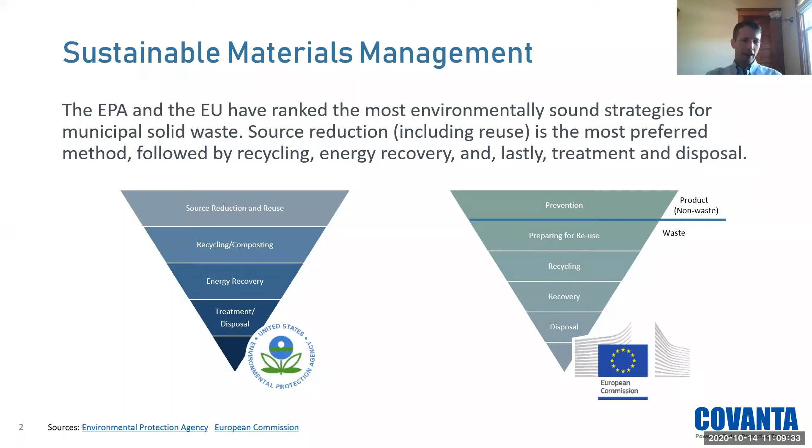And certainly a lot of the discussion that we've had recently with regard to the pushback from China in terms of contamination, and most recently with the Climate Leadership and Community Protection Act in New York, we're all looking again at the waste management approaches from that environmental framework, and I think very appropriately taking a more expansive view of it. And where energy from waste, or waste energy, really fits in is as the preferable option for what's left over after recycling efforts have been exhausted.

And years ago, I think this really started around the idea of materials efficiency, energy recovery, sustainable use of land, and over the decades, particularly as climate has become a greater concern, we found that the climate change impacts are roughly in order with this hierarchy as well. And so if we look at those two choices left over after recycling, landfilling and waste to energy, they're still the two predominant ways of managing waste that's left over after recycling. We can get into a little bit of the detail in terms of what drives that ordering in the hierarchy.

From the climate perspective, landfills are a major source of man-made methane. Globally and in the US, landfills represent the third largest source of methane. And methane is an interesting greenhouse gas because it is very, very potent, yet has a relatively short time frame in the atmosphere. So when you look at methane's impact over a 20-year perspective, as we're starting to see more policymakers and scientists do, methane is actually 84 to 86 times stronger than CO2 in terms of its impact on the climate.

Turning to other non-greenhouse gas issues, and certainly one that's of particular interest, I think, to folks in California, is the risks around leachate generation and groundwater contamination. A lot of times you'll hear people within state regulators and the EPA talk about, it's not if landfills are going to leak into the environment, it's when and what's the impact to the surrounding community.

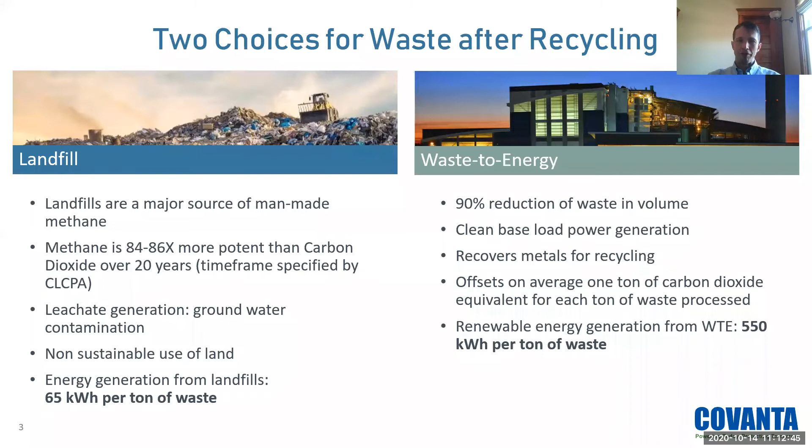I know Derek will speak about that a little bit more during his presentation. And if we look at things from a climate perspective, turning back to that again, every ton of waste nationally that we're able to divert from a landfill to a waste energy facility saves about a ton of greenhouse gas emissions as CO2 equivalents. That's a fundamental benefit of waste energy over landfilling. And it's one we often get a lot of questions about, because it's not necessarily intuitive to tell somebody that a facility with a stack has a greenhouse gas benefit.

The reality, and what really drives that, has to do with what would have happened if the waste did not wind up in a waste energy facility. So if we look at this chart, the first bar on the left-hand side shows the picture if we look just at the stack in terms of what the CO2 emissions are. We find that roughly for every ton of waste we process, we emit about a ton of CO2.

Two-thirds of that CO2, in terms of what we monitor today, is from biogenic sources of waste. Think about food waste that's not sent to an AD facility, or paper and cardboard that hasn't been recycled. That all contributes to that two-thirds.

The remaining one-third of the waste we process, and the carbon in that waste, is from plastic materials — think non-recyclable plastics, plastic films, containers that don't get recycled. That's typically the focus from a public policy perspective: reducing those fossil CO2 emissions down to what we possibly can. That's the basis for the comparisons on a life cycle basis that the US EPA and others do.

The second bar then starts to look at what would have happened if the waste energy facility were not in place. The first piece is what we would have needed to make that electricity from another resource. Still today in New York and other places, we still generate a lot of our electricity from fossil fuel fired power. So that's a significant benefit that our facilities are able to deliver.

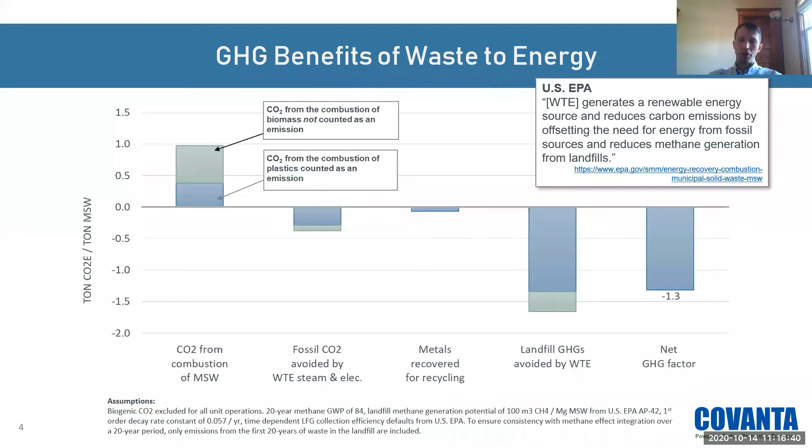So you sum all of that together, taking into account our positive greenhouse gas emissions at the stack, but also considering the benefits the technology brings. In New York, under the Climate Leadership Act, we're actually reducing emissions relative to landfill by about 1.3 tons of CO2 equivalents per ton of MSW.

And importantly, it's not just us saying this. It's very widely accepted internationally in terms of the benefits that waste energy brings, anywhere from the European Environment Agency to the IPCC, which called waste energy a key greenhouse gas mitigation technology, to the UN and the Rio UN conference, World Economic Forum. The original Clean Power Plan as proposed by the Obama administration would have considered waste energy to be an option for reducing a state's greenhouse gas emissions.

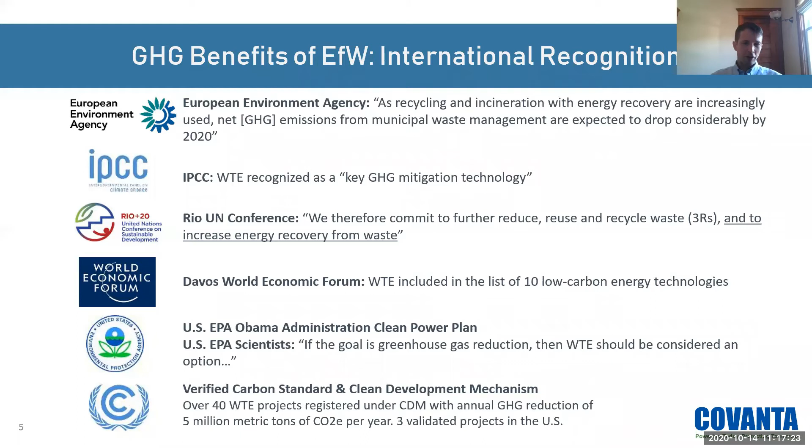And we actually have three facilities that have been approved to generate carbon offset credits, and two of them sell those credits into the voluntary carbon market.

And if we look back at New York, one of the challenges that the state faces is how to deal with the emissions from landfill methane. Amazingly, landfill methane is 11% of the state's greenhouse gas baseline, which is just an amazing amount for a sector that typically doesn't get a lot of attention when it comes to greenhouse gas policy. And when we look at it, it's even more than residential fuel combustion. The challenge the state is going to face is that we really don't have great end-of-pipe options for controlling the methane that landfills emit, which goes back to the waste hierarchy.

The best form of environmental protection often is prevention. So the more waste that we can divert out of landfills, the better chance we stand in meeting the state's targets. And part of the challenge is that when we actually get out and measure methane emitted from landfills, it's coming in at about double what the predictions initially thought.

And when we turn even to California, they've struggled with this for the last almost a decade now, and implemented as part of their greenhouse gas reduction program what they call a series of early action measures, and implemented the most stringent landfill gas control regulations in the country.

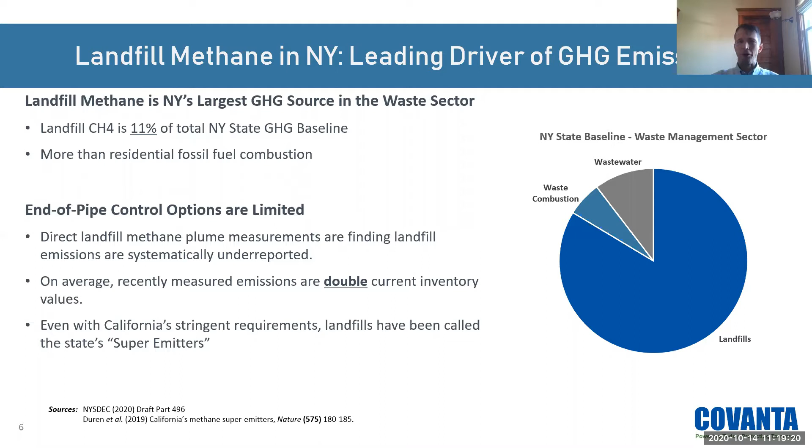And even with those regulations, when NASA did a study of what the methane emissions were and what the methane sources were in the state of California, they found that landfills were the largest point sources of methane in the state, and characterized a subset of those landfills as being methane super emitters. That really underscores the challenge we face with regard to trying to control methane after we've put the waste in the landfill. It's just extraordinarily difficult to capture what we need to do to reduce greenhouse gas emissions.

So what that really brings us to is what our options are. It's pretty clear that the Climate Leadership and Community Protection Act is going to impact every single sector in the state's economy very significantly. Getting the economy of the state down to net zero carbon by 2050 is just a phenomenal task. And it's clear in the waste sector that we just really need to get out of the business of landfilling. We need to find better things to do with the waste, whether it be recycling, composting, anaerobic digestion, but also using waste energy as appropriate to help us reduce emissions from the residues that are left over after recycling and composting is exhausted.

And I think there's a few things here that we just wanted to point out. In order to get down to that net zero greenhouse gas emissions, even the waste energy sector is going to have to take a hard look in terms of what our facilities look like in, say, 2040 and 2050. And what I like to think about our facilities is that they're really important technology platforms where we can bring a lot of carefully engineered solutions to the table.

Recognizing that there's always going to be a residual waste that we need to manage, and that residual waste is going to have some form of an impact. Waste energy facilities give us an engineered potential to actually reduce and minimize that impact. And one of the really great aces in the hole that I think we've got as an industry is that one of the things the IPCC has pointed out is that in order for the world to get to a net zero greenhouse gas scenario by 2050, we're going to need to figure out how to do some carbon removals from the environment.

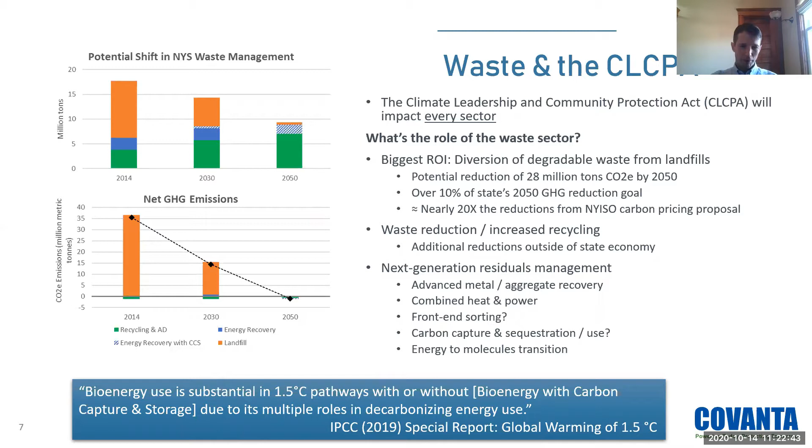All right, thanks Mike. Good morning everyone, it's a pleasure for me to be here and take part in this.

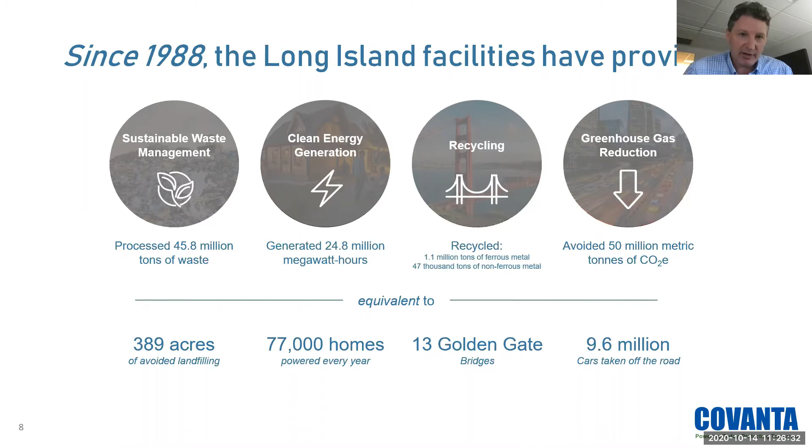When you think about making fundamental improvements around infrastructure and ways of life, I would argue, if you're stuck in traffic, frustrated with how long you're stuck, anything we can do to clear the transportation lanes of unnecessary truck traffic is fundamentally very important.

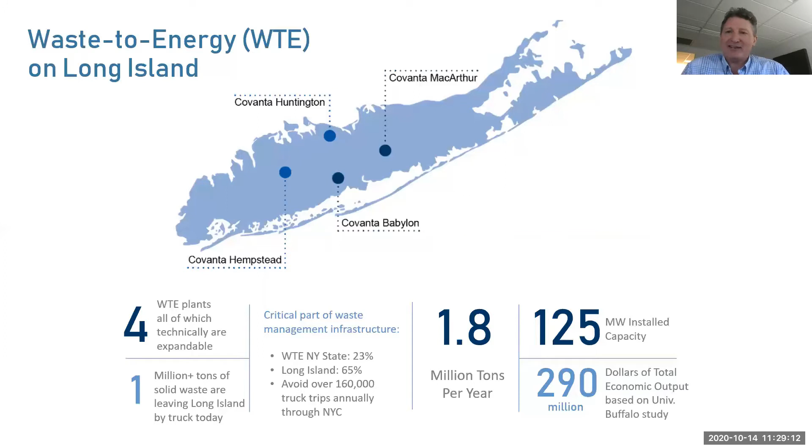So Mike, why don't we go to the last slide?

Part of my job is a little bit of a salesy job. Mike's the science guy, my job is a little bit of the sales guy. So I like to think about what's really possible for energy from waste on a go-forward basis, in the context of, you know, when I mentioned back in the mid-80s.

You know, nobody had a cell phone really unless you were in the military. If you were traveling somewhere and needed a phone, you were in a phone booth adding quarters, trying to make a call, trying to figure out where you needed to get to, right? And today we have a smartphone at the tip of our finger that gives us more information than we possibly know what to do with.

But at the same time, when you look at energy from waste, the basic fundamentals are still as strong as they were in the late 80s. Good mass burn technology coupled with sophisticated air pollution control has done remarkable things. After 30 years, it's still performing well, and we've been able to drive emissions even lower over that time frame.

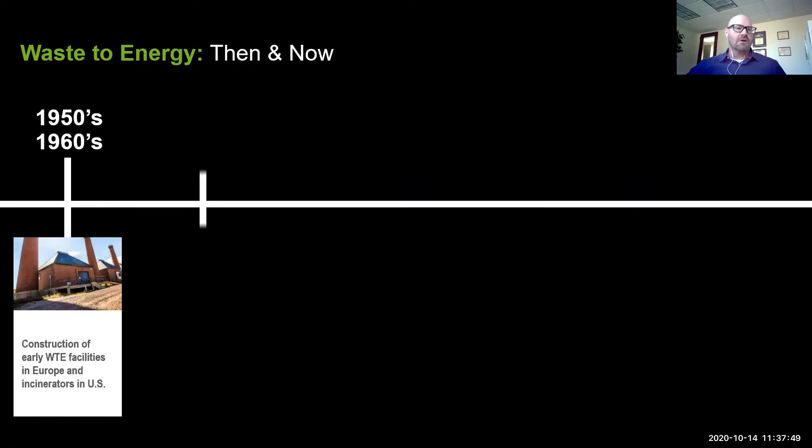I'd like to start off by talking about where we started and where we are now. As a way of history, in the 50s and 60s is really when Europe started to build their first modern waste to energy facilities using combustion stoker technology and recovering the energy to create steam and electricity. The U.S. took a little longer to catch on. In the 70s, as many of you know, the majority of our facilities were built in the late 70s and early 80s, and a lot of those facilities are still in operation today, including the 4 that are out on the island that Derek mentioned.

The 90s, particularly the late 90s, which is when I got my start in the industry, was really more focused on the Clean Air Act amendments and retrofitting a lot of the facilities that were built, particularly in the late 70s and early 80s, that weren't built with the Clean Air Act amendments in mind. That's kind of how I got my start in the industry, working on those retrofits, including at the Islip MacArthur facility.

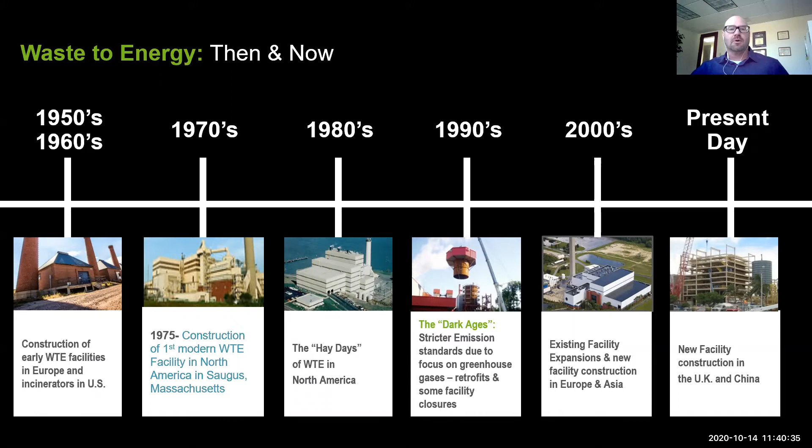But the United States becoming really an energy exporter, the price of electricity really drove down the economics of a lot of those projects, and really only 2 in North America got out of the starting gate and implemented. But that being said, in the present day, there's still a lot of activity in Europe, as Derek mentioned, and in Asia, and there's still interest here in North America as well. And there's a lot of discussions about expansions, particularly in certain geographies of the U.S. and even some contemplation of new capacity in parts of Canada and other parts of the U.S.

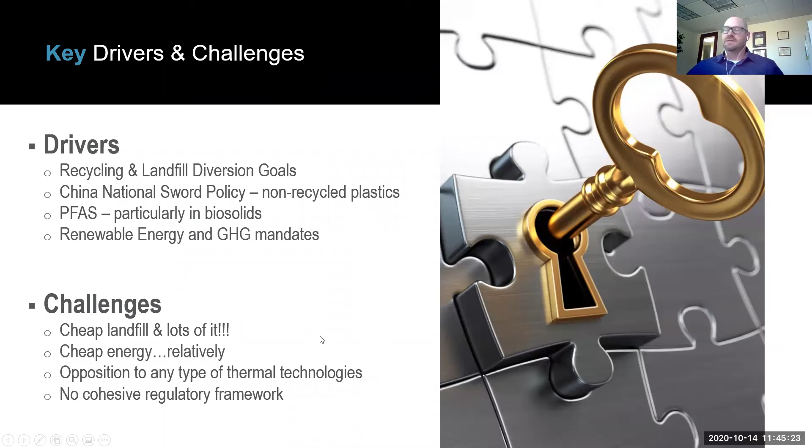So just a really quick technology 101, and I won't get too far into the theory here. Really my focus today is more on thermal treatment or thermal technologies like traditional mass burn or RDF combustion technologies, which use excess air or a lot of air to treat and combust the waste. And then we'll also talk a bit about gasification and pyrolysis and plasma arc technologies, which typically operate under a substoichiometric or less than excess air, or in the presence of very little air or oxygen or no oxygen at all.

But there are other technologies out there, obviously biological treatment, and there's a lot of interest in anaerobic digestion for treatment of organic materials, which is really a proven technology for something like sludge or biosolids, but it's still in development, particularly for a mixed municipal waste stream. But it's a growing interest, particularly up north of the border in Canada, out west in California, and in parts of the Northeast as well.

And then we'll talk a little bit about mixed waste processing technologies, but I combine those really with a lot of these alternative thermal treatment technologies, which require some front-end processing, or they're part of a hybrid type system that may use a very elaborate front-end system to separate out the different materials, followed by a thermal treatment process, and then sometimes a chemical treatment process to create a fuel.

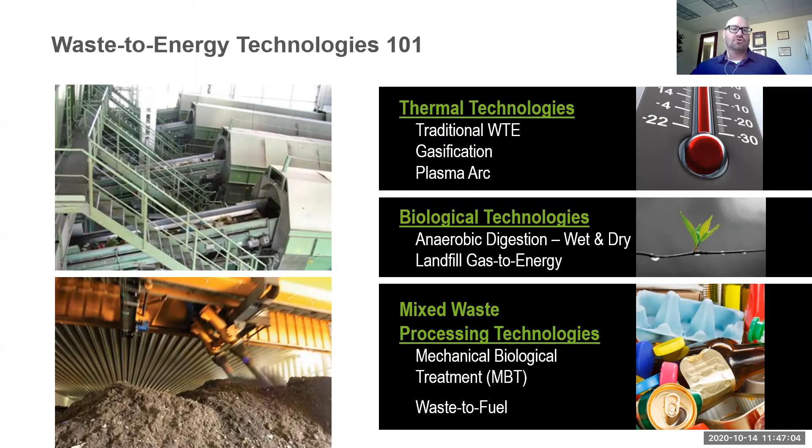When I speak to groups like yourselves or municipalities or industry groups, I always like to try to classify waste conversion technologies into two pieces. There's the established technologies like mass burn or RDF combustion, and I think Derek made this point previously. I'd stress that the facilities being built now are not your grandma's waste to energy plants. They're far more efficient from an energy production standpoint, as well as from a flue gas treatment and air pollution control standpoint, than the facilities we built even 20 or 30 years ago.

So whereas we kind of stopped building them here in the U.S. for a number of reasons, in Europe and in Asia they never really stopped. And instead of halting the industry, they really developed them and fine-tuned them to be really efficient and clean facilities.

And then there's emerging technologies, and some of these may not be considered emerging in other parts of the world, but I'll talk a little bit about the differences there. Those emerging technologies are really ones that haven't had a wide commercial application, like gasification, at least for mixed municipal waste, or pyrolysis or anaerobic digestion, that at least here in North America and in the US are still in various phases of development, with starts and stops and successes and failures.

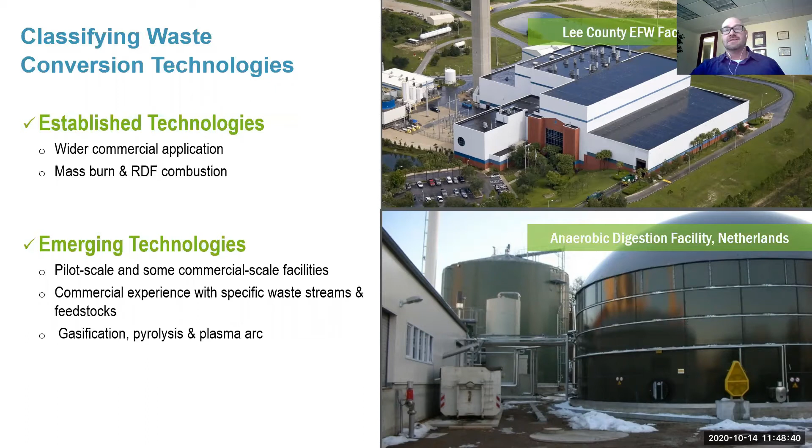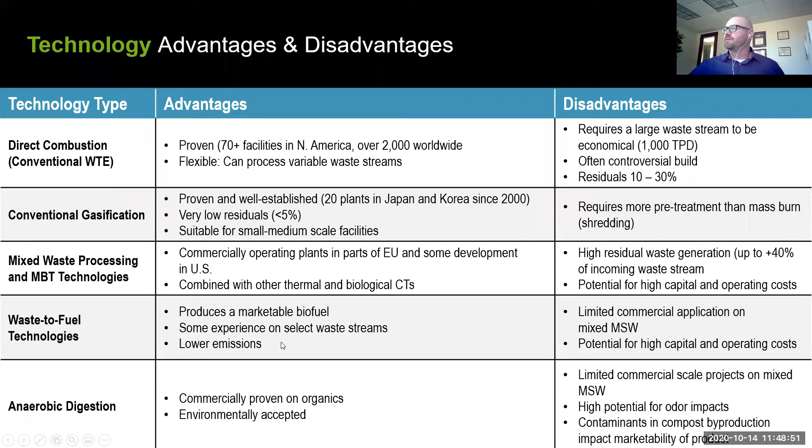So this is just a quick overview of advantages and disadvantages, and I'll make the presentation available to folks, but I'm going to keep moving if that's all right.

So just to go through a little bit of a global perspective on waste to energy and where the technology is abroad, and Derek touched on this particularly in the projects in the UK and in Ireland, the EU has a landfill directive that requires some pre-processing before you can put it in a landfill, if in some countries you're allowed to landfill at all. In countries like Denmark or Germany, there are landfill bans, and in most EU countries, if there's not a ban, there is certainly a financial disincentive, either taxes or levies, like in the UK, that make it incredibly expensive, sometimes $100 a ton on top of a gate fee, to put it in the landfill.

And again, they have different drivers in the EU. They don't have the space that we have here, and that drives a lot of it. But it's also a sense of environmental responsibility that they feel.

I've heard Europeans, when I've been over there, call it interim storage, that at some point or other, those liners are going to fail, and it's just a more responsible method to treat it in some manner before it gets put into the ground.

They also have higher energy pricing, and there's government incentives that exist in the EU and in some of the EU member states or in the UK, whether it's on the power they buy or on the projects themselves, that just don't exist here or in other parts of the world for that matter.

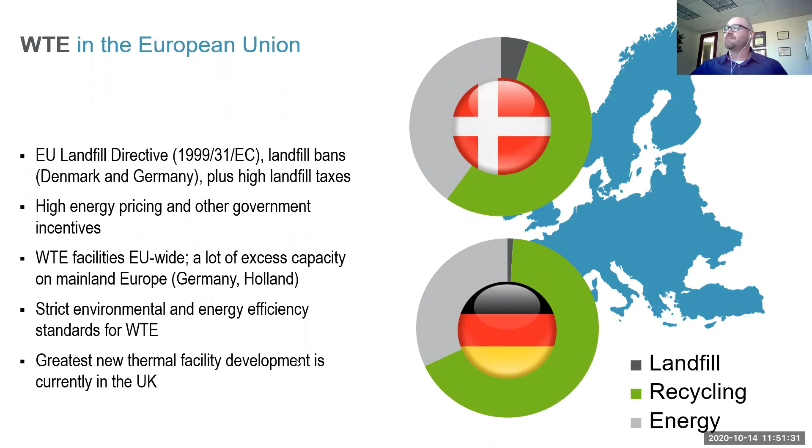But there is still some development, particularly on specific waste streams, whether it be plastics or hazardous wastes, that they'll use the high temperature type gasification projects to treat those wastes. But overall, when it's municipal solid waste, it's typically a thermal combustion type stoker project. And that being said, they still have very strict environmental regulations in the EU, and emissions requirements, much more stringent than the US in most cases, and they're able to meet those with mass burn technology.

And it's widely accepted. And this is a good example, and I think Derek was alluding to this in his presentation, that they also take a very different approach to how they build and the aesthetics of these facilities. Very often these facilities sit right in the middle of a city. Copenhagen is a good example. There's 4 to 5 facilities in Greater Copenhagen that all feed into their district energy system. And this was one they constructed a couple of years ago that actually has a ski lift on it.

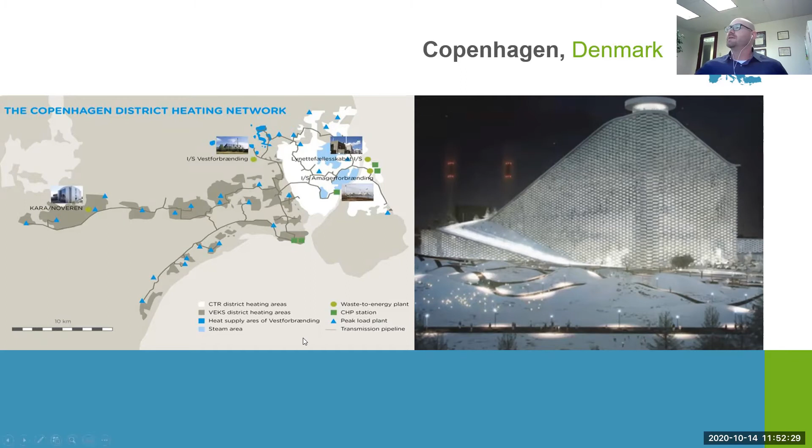So, money is no object apparently, but they certainly take a lot more pride in these facilities and in developing the aesthetics. This is another project. This one is in the UK in Oxfordshire. And you can see, again, it's an example of how they expand the architecture, and really, they want these facilities to be a showcase because, again, very often they're right in the middle or just outside of a town, and they provide district energy as well as electricity to that community.

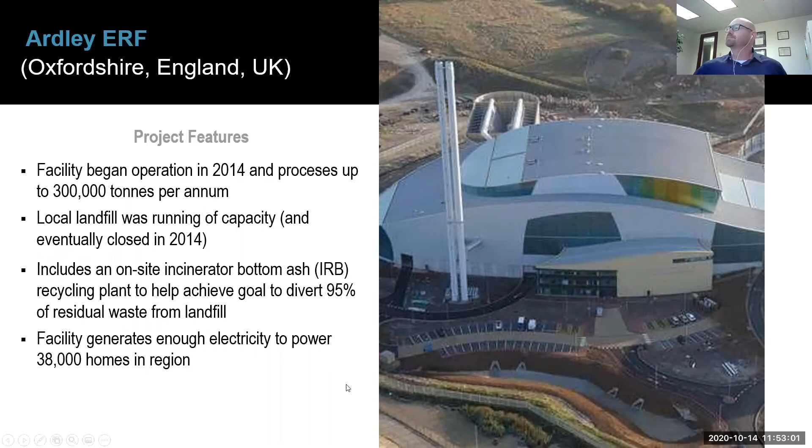Europe hasn't gone without its challenges and failures. I'm sure many of you heard about the Tees Valley project, and this was a plasma arc facility or technology. Alter NRG was the main technology provider for this, and Air Products, which is a major gas provider company in the U.S., was really backing this project for a number of reasons. And this is a good example of the dangers of scale up, in that the technology that Alter NRG had applied in parts of Asia was maybe at most 200 to 250 ton per day sort of modules.

And this was a scale up to 1,000 tons per day. So that 4 to 1 or 5 to 1 scale up really was never proven. And they ran into a lot of design and operational difficulties, and ultimately financial difficulties getting that facility online. And eventually Air Products walked away from it at a loss of almost $1 billion US. So, you will see some more of these as I go through the technologies.

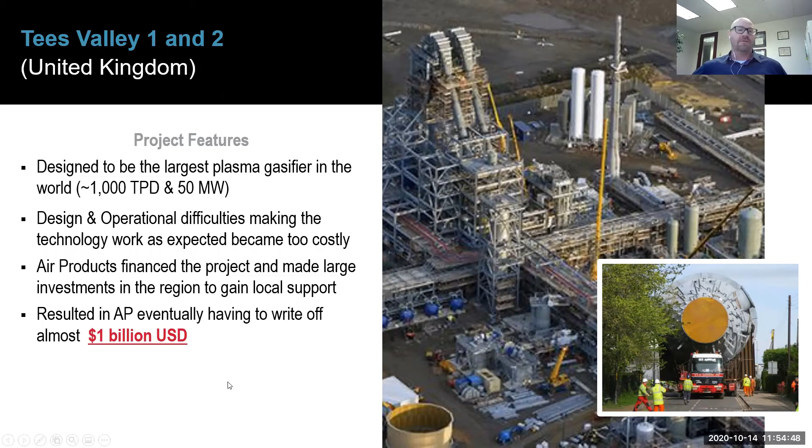And I'm technology agnostic, but also as an engineer, and often advising communities like out in the island or wherever I've advised clients, I've got to take that level of caution that things like scale up are important. Things like experience with similar feedstocks is very important. And this was a good example of a lot of money being spent without fully thinking through whether the project was going to be successful.

Asia is interesting and very different. Certain parts of Asia are very similar to Europe, particularly Japan. They don't have a lot of space to get rid of waste. They don't have a lot of landfill space, and each prefecture in Japan is required to manage their own waste streams. So a lot of their drivers are very high population, not a lot of space to build additional landfill capacity. In places like China, it's kind of a shift to be more responsible and find ways of treating it versus landfilling it. And so they're more open to not just traditional thermal waste to energy.

Japan certainly has a lot of traditional stoker-type technologies implemented all over, but they are also more open to gasification-like technologies, and I'll talk more about that. In Japan, they may have a stoker technology, and the ash residue coming out the back end of that traditional waste energy facility will then go through a gasification or ash melter process to vitrify the ash or further treat it so they can use it for road base or as fill material, which is very different than how we treat ash here in the U.S., as Derek had mentioned.

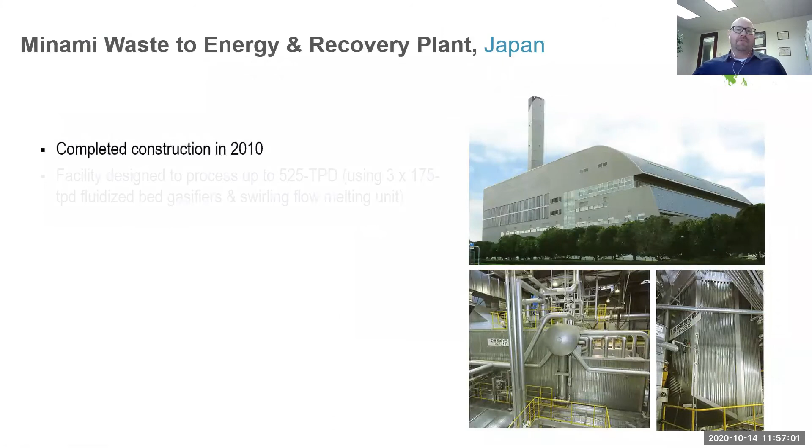So this is an example of a gasification plant. I've had the opportunity through HDR, and also work I've done for the Air Force, to go to Japan and visit some of these facilities. It is a mixed waste material.

Obviously Japan is very regimented as far as what they separate. If you go into a McDonald's in Japan, there must be 4 or 5 bins, and one of them even includes a bin with a little fire on it to indicate that's stuff that will go to the waste energy facility. So they're very regimented in how they separate materials at the source. But at the same time, because of regulations and because of limited landfill space, they're also often more open to some of these gasification technologies.

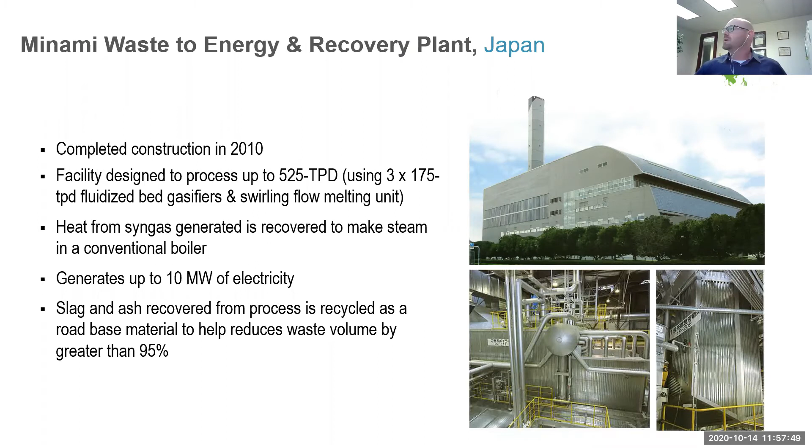This facility, as well as the next one I'll talk about, that I had the opportunity to visit, it's a mixed waste material. You can look in the pit and it looks like our garbage, although a little more separated. And they process it. I think the important thing to understand too is, when I've gone there, they don't necessarily try to reuse the syngas and create a fuel or something out of it, like some of the technologies that are advertising here in the U.S. or other parts of the world.

They almost treat that gasification technology — it doesn't look much different than a mass burn stoker as far as having an air pollution control back end that cleans up that syngas and then releases it through the stack, and they just recover the heat from that syngas in a heat recovery steam generator or boiler, similar to how we would in the 4 facilities out on the island. They're very wary, and they've tried to do more with that syngas, but I think they feel the technology and the science just isn't there yet to make it economically feasible. So that's important to understand when you hear some of these technologies come out and say, yeah, we're going to convert this into a fuel or some sort of biofuel.

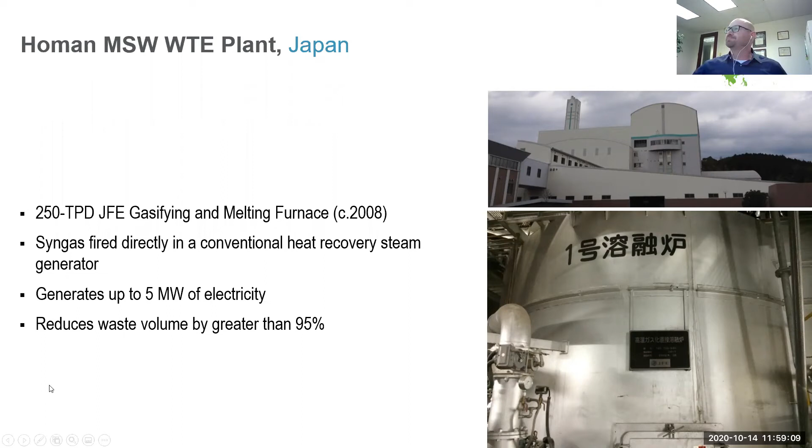So coming back to the U.S., just by way of background on where things are: we still have over 70 facilities in operation today. That number seems to shrink every year, unfortunately, due to economic and even socioeconomic reasons, with facilities being closed down or forced to close down. But we still landfill a lot of our waste stream, and less than 10% — a number that probably continues to dwindle — of our waste stream in the U.S. is actually processed through a waste to energy facility.

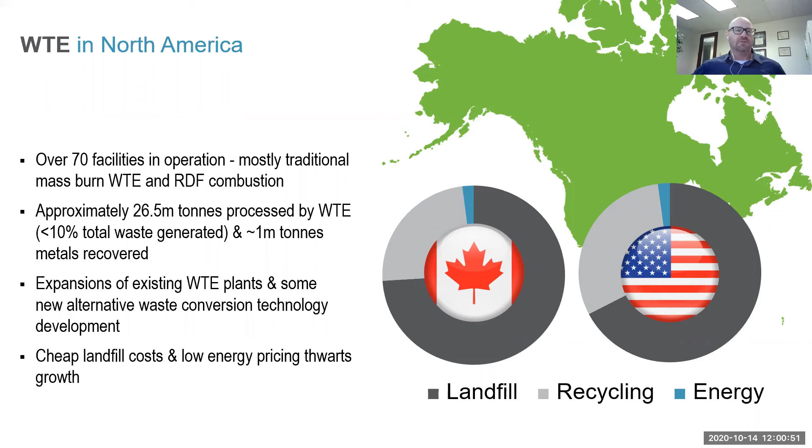There's still a lot of discussion of expansions or even building new facilities, particularly in certain parts like Florida, or maybe there's consideration on the island for that matter, given some of the challenges out there. But the challenge remains cheap landfill costs, and looking at the economics a little differently, since we're not going to get the same electrical pricing that we got in the 80s or 70s during the oil energy crisis. So how do we pivot what we traditionally did with these facilities and maybe open them up to other initiatives, like Derek mentioned — zero emissions and electrification initiatives being contemplated, particularly on both coasts, with converting fleets to electric or that move to electric vehicles.

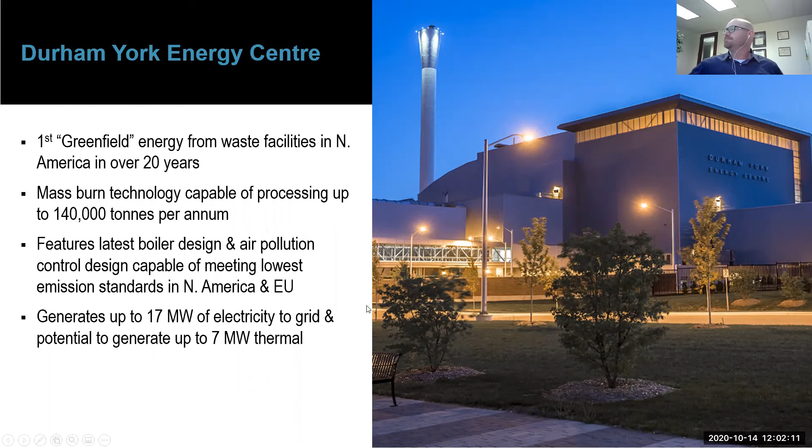Many of you may have heard about the Enerkem project. You probably haven't heard a lot about it other than it exists, and you're not alone. I've been to the facility a few times.

This is a good example of a hybrid type system where it's a mixed waste front end process. That was built by the city of Edmonton to separate out different materials, improve their recycling, and also to capture organics. The off-stream of that mixed waste processing or front end system is this sort of spec fuel, I'll call it, that goes to the Enerkem biofuels facility. They take that fuel and convert it into methanol and then ethanol through a Fischer-Tropsch type process - gasification and then Fischer-Tropsch - which is a proven process certainly in the petroleum or oil industry, but not so much in the chemicals industry, and really not quite proven for a mixed municipal stream.

They claim to be converting the waste into 10 million gallons a year of ethanol, but depending on who you speak with - and it's very hard to get information from these guys - when I was there, to be honest, I wasn't sure if they'd turned it on an hour before I showed up, but they are still out there trying to do it.

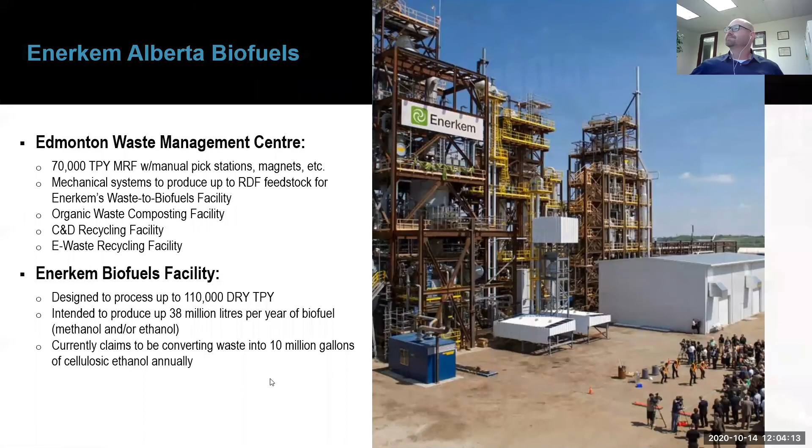Fiberight built a facility up in Hampden, Maine. Again, I tend to be technology agnostic, and I don't want to always seem like half empty - I'm an engineer, so I think it's twice as big as it needs to be, not half full or half empty. But I think in this case, this project was touted, and a lot of the local communities signed on to this technology. They were going to process up to 400 tons per day of MSW for those surrounding communities.

It finally opened in 2019, but earlier this year they announced they were closing indefinitely due to financial and, I think, some technical issues. The towns are currently looking for a new buyer and operator for that facility.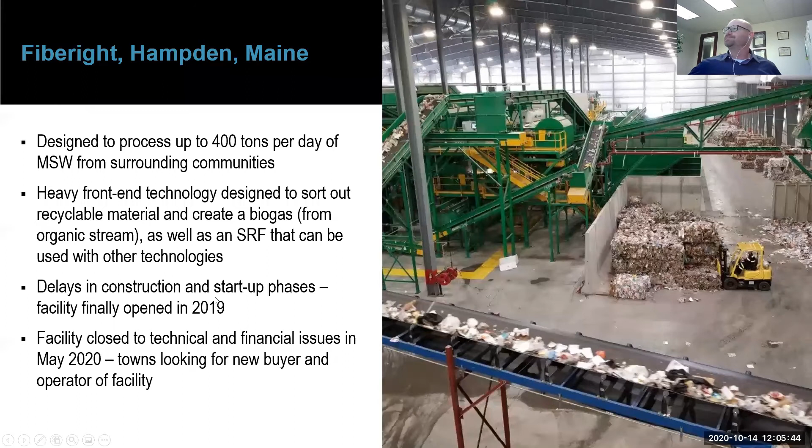And there's other projects out there too. Derek and Mike mentioned the interest in hydrogen and that sort of shift to a hydrogen economy. There is a fair bit of interest in waste to hydrogen. I've worked on projects in the Middle East, of all places, where they're interested in looking at that. I don't think the technology is quite there yet.

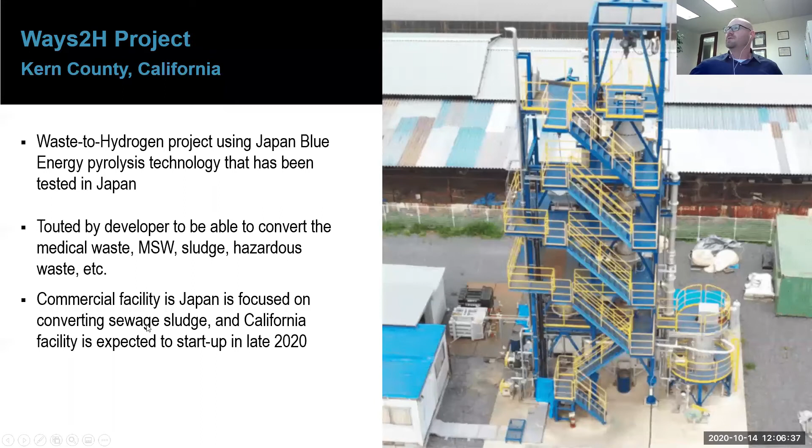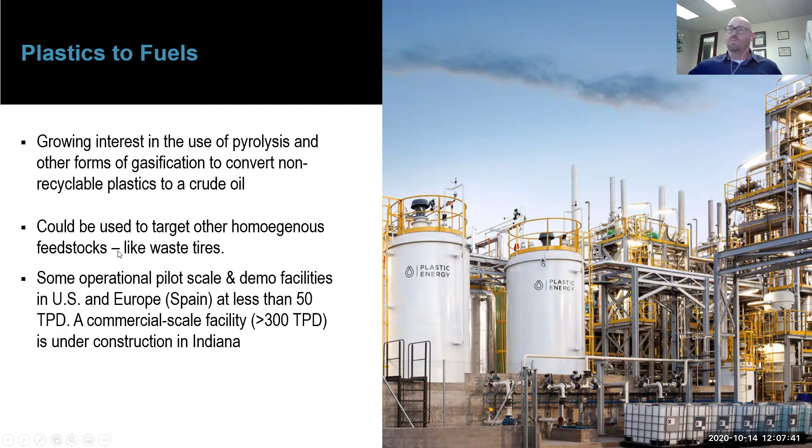Another growing driver of interest in the thermal and waste conversion market is plastics to fuels. I mentioned the China Sword issues with the non-recyclable, basically 3 through 7 plastics. I'm very hopeful and optimistic about these technologies for plastics because it's a more homogeneous fuel stream, and there's some history behind the ability to convert those streams into either a crude oil or some sort of syngas that might be used. There's a number of technologies out there at different scales in the U.S., as well as on a commercial scale in other parts of Europe or Asia.

So it's still being developed, but it's got a lot of growing interest in different parts of North America, as people try to figure out what to do with those waste plastics that we can't really find a recycling home for. So I'll wind this up with some final thoughts. I think the important thing to note is that this is still very much a challenging industry. I think there continues to be that need for education at all levels of government or regulatory agencies, and in the general public on what waste to energy is and how it's used around the world.

As well as on technologies. A lot of the times these technology providers, they don't come to guys like me or public works directors. They go to the politicians and say, we're going to turn your phone books into gold. And then it sends folks on a goose chase on whether it's really real or not. But I think there's a place for alternative technologies as well as traditional waste to energy, and that fits within the waste hierarchy.

And I think with the alternative waste energy technologies, like gasification and pyrolysis, there needs to be a little more research and advancement in that technology, really pinpointing what feedstocks it works best for and what the financial feasibility of those types of projects are, taking some of the lessons learned both from Europe and Asia as well as here in North America. We've had our share of failures as well, so we shouldn't make the same mistakes again. And again, this is in the current times we're in. That last bullet point, cooperation amongst all government levels, is a big wish item, but that's really what it's going to take to get some of these projects across the finish line.

So with that, I thank you, and I'll turn it back over to Mike.